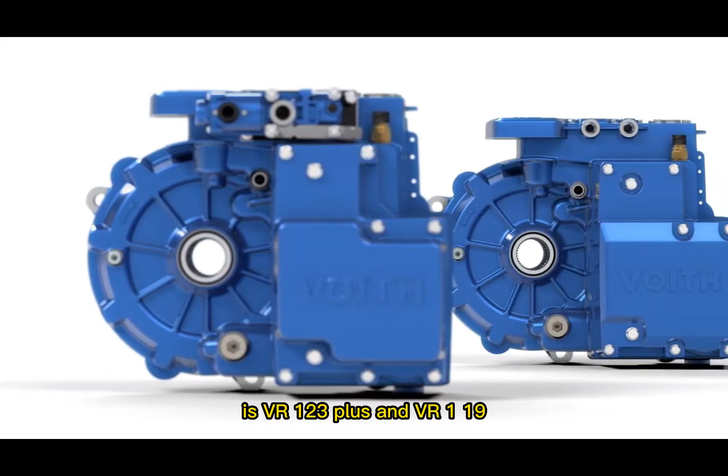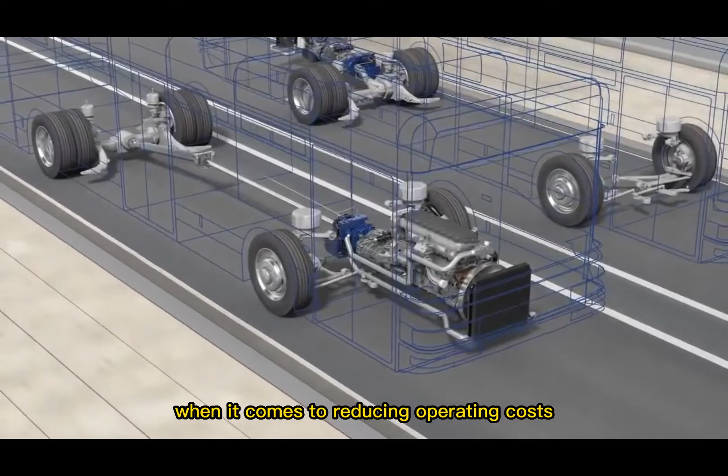VR123 Plus and VR119. The Voith retarder is an efficient, continuous braking system that brakes coaches and trucks economically, comfortably, and wear-free. This animation shows what Voith retarders can do, how they work, and most of all, which advantages they offer when it comes to reducing operating costs and increasing safety and driving comfort.

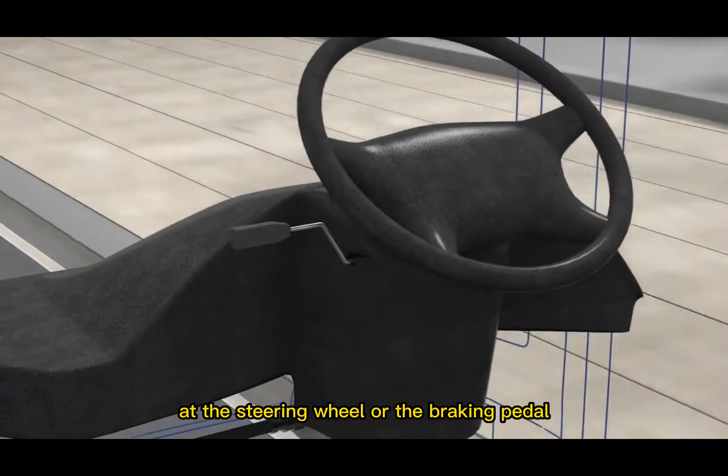See for yourselves. Voith retarders are installed directly to the transmission and are activated via a manual switch at the steering wheel or the braking pedal. During this activation process, the electronic control unit of the retarder communicates with the vehicle brake management.

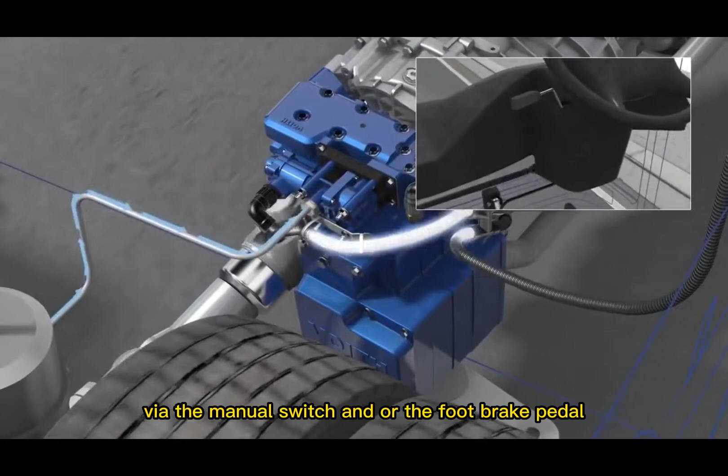How does the Voith hydrodynamic retarder work? When activated via the manual switch and/or the foot brake pedal, the retarder receives an electronic input signal from the retarder control unit. The oil sump is supplied with compressed air.

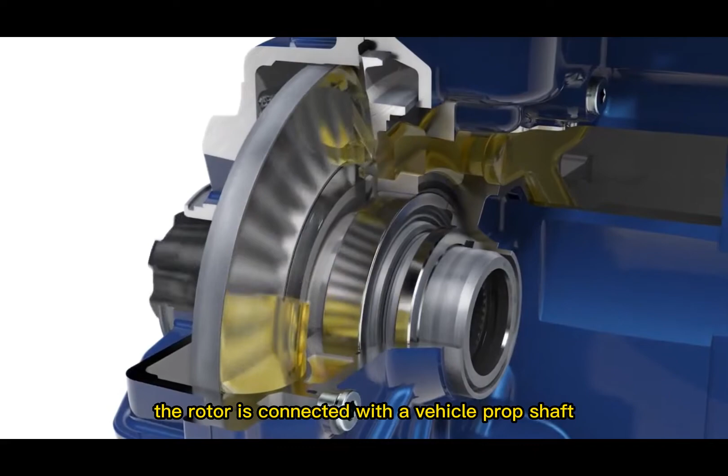Oil, to be used as operating medium, is moved to the inlet throttle via the riser duct, and from there into the retarder circuit between the moving rotor and the fixed stator. The rotor is connected with the vehicle prop shaft. Through its rotary motion, it accelerates the oil, builds up braking torque, and is pulled into braking position via a helical gear.

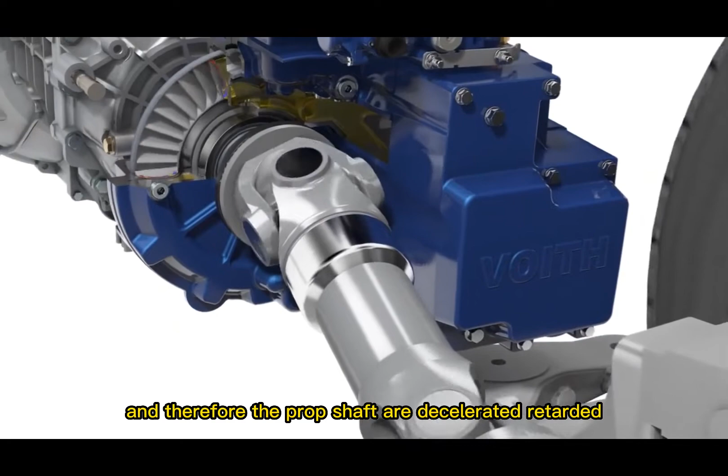The rigid stator redirects the oil and moves it back to the rotor. Result: the rotor, and therefore the prop shaft, are decelerated, retarded. The vehicle is decelerated.

During braking with the retarder, the kinetic energy of the vehicle is converted into heat and dissipated to the oil. Via an oil-water heat exchanger and the vehicle cooling system, the oil is then recooled.

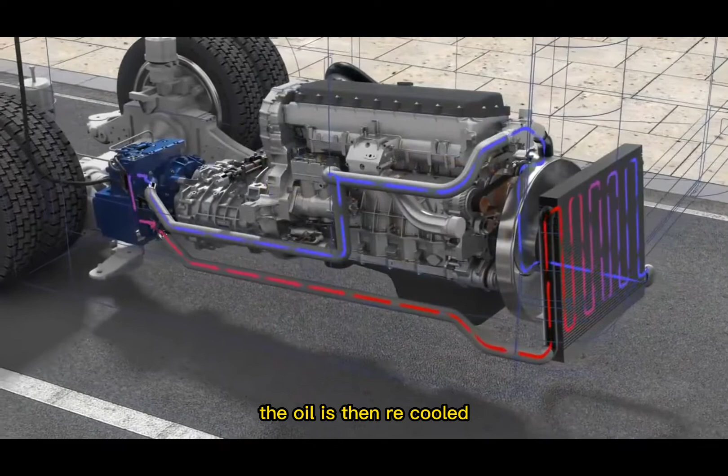After each braking operation, a spring moves the rotor back into idling position via a helical gear. This rotor shift away from the stator prevents ventilation and consequently unnecessary fuel consumption.

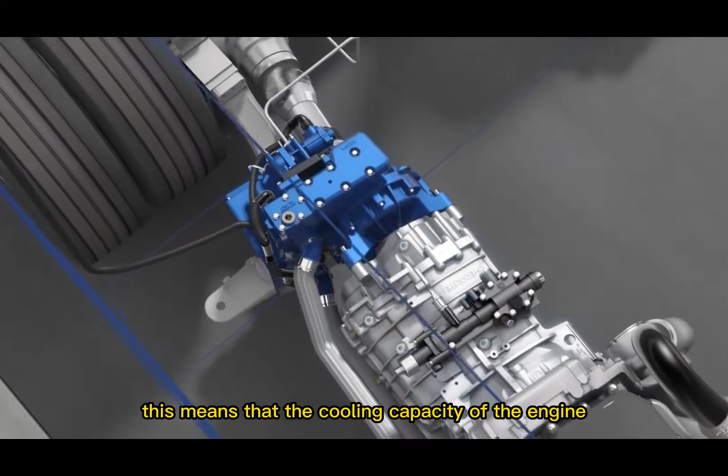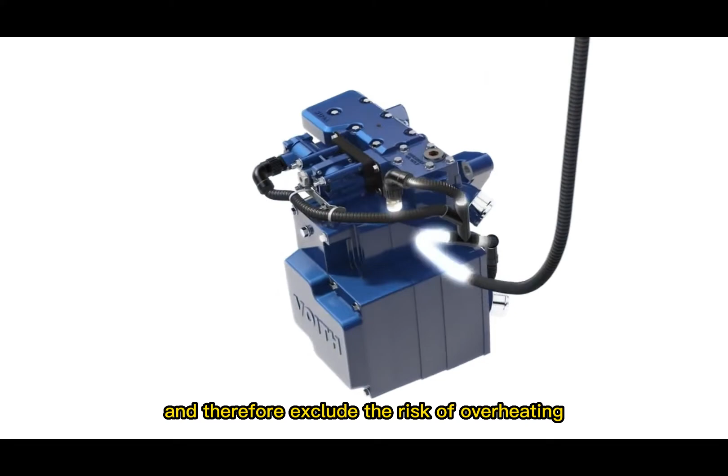During braking, the engine does not burn any fuel. This means there is no additional combustion heat, so the cooling capacity of the engine is exclusively available for the retarder. Temperature sensors at the electronic control unit, ECU, monitor the system and therefore exclude the risk of overheating.

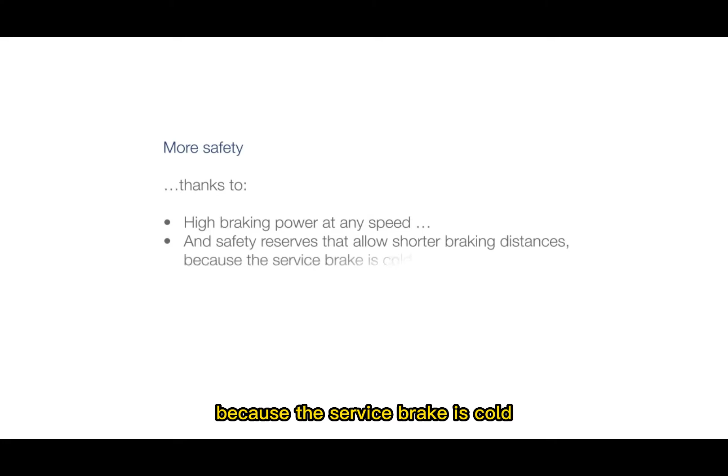Advantages and facts that speak for the Voith retarder. More safety, thanks to high braking power at any speed, and safety reserves that allow shorter braking distances because the service brake is cold, which means that maximum braking power is available. In this way, Voith retarders make a significant contribution toward meeting the ECE R13 legislation.

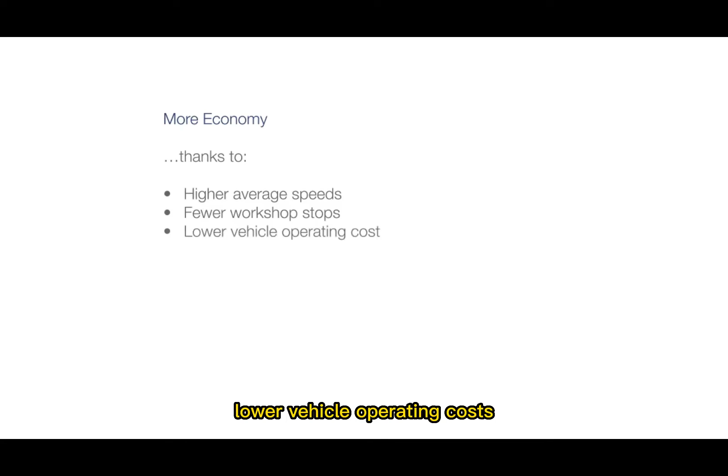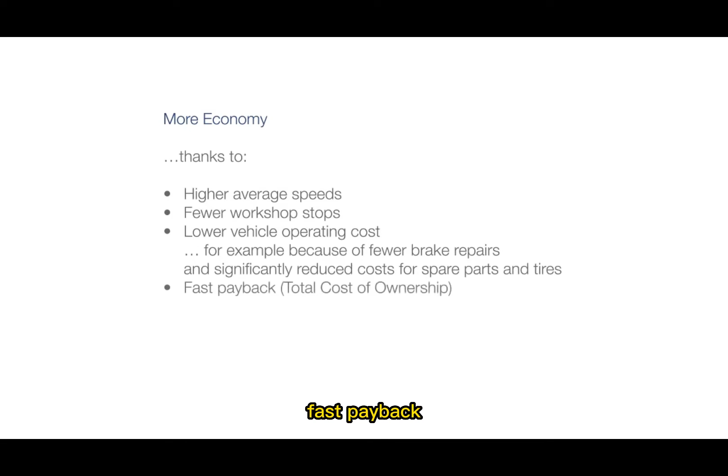More economy, thanks to higher average speeds, fewer workshop stops, lower vehicle operating cost, for example because of fewer brake repairs and significantly reduced costs for spare parts and tires. Fast payback, total cost of ownership, and last but not least, advantages when the vehicle is sold on.

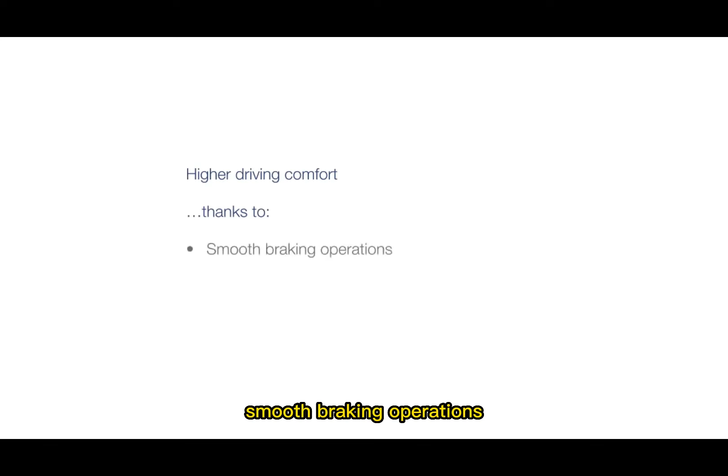But most importantly, Voith retarders save fuel. Higher driving comfort thanks to smooth braking operations, fewer gear shifts, and therefore no stress for passengers and drivers. More sustainability for the environment, because Voith retarders help reduce CO2 and fine dust emissions and protect resources.

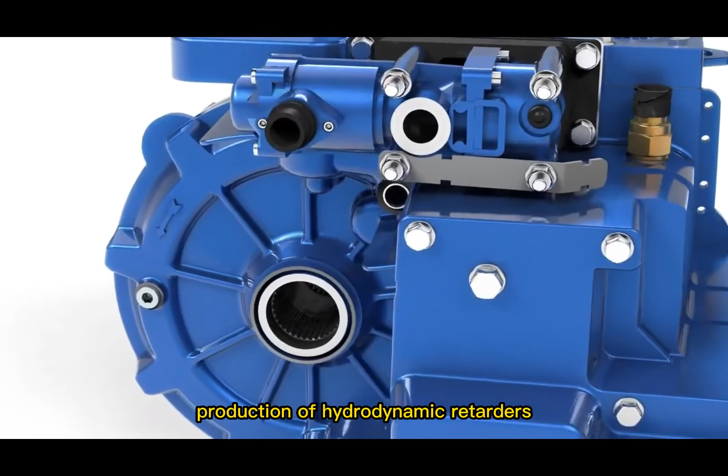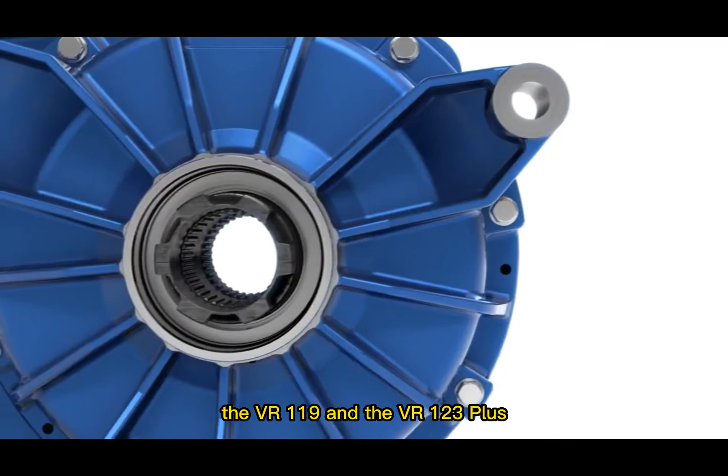As an innovative partner for the development and production of hydrodynamic retarders, Voith can offer genuine continuous braking solutions: 2 retarder versions with local production in India, the VR119 and the VR123 Plus. The design and function of both retarder types are identical, but the difference is in the detail. Voith, engineered reliability.